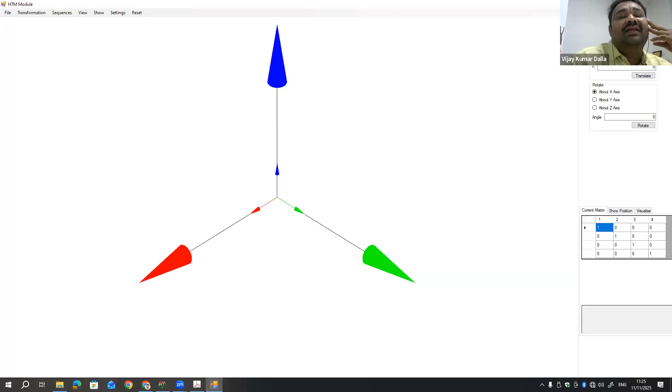So through this software, we are going to visualize. Now please look into the window on the right side and see here local and global transformation. Local transformation is by default clicked, and one can see translate and rotate options, and in translate there are three axes: x, y, z. Initially the values are 0.

After putting some values, we need to translate, and then we can visualize. Also if we click rotate about any axis like x, y, z, then we can see the rotation of the frame. Here one can see there are two frames, a bigger one and a smaller one, both coinciding with each other at the origin.

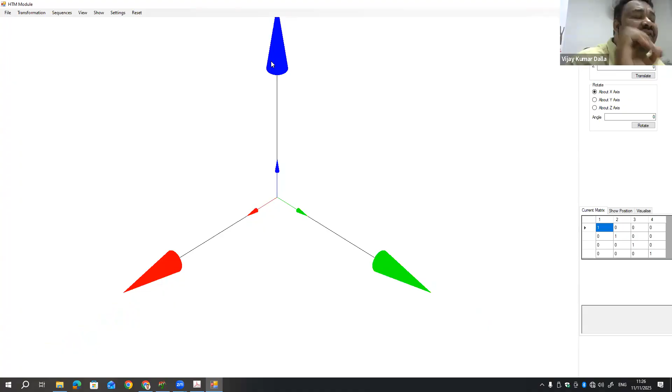So the bigger one is the fixed reference axis, you can say, or absolute frame, and the smaller one is the moving frame.

So what is the learning here? What is transformation? I have told the definition. And what are the various types of transformations? Pure translation, pure rotation, and the third one is rotation plus translation.

Am I audible? Please let me know if it is useful, if you feel that yes, we are gaining something from this.

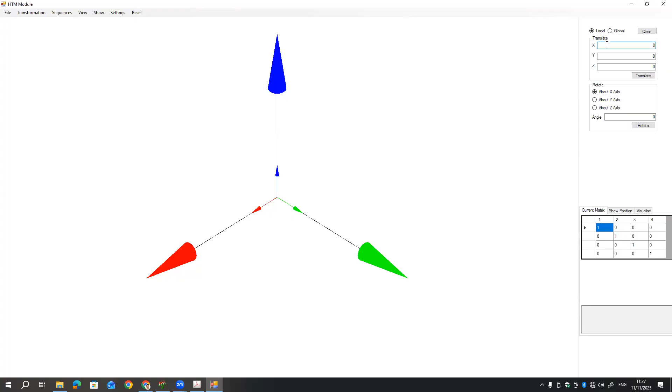So now we have to visualize the translation. You may have already studied or taught translations before. Let me know if there are some queries. No queries, I think. Okay, so now for translation, suppose we want translation in the x direction.

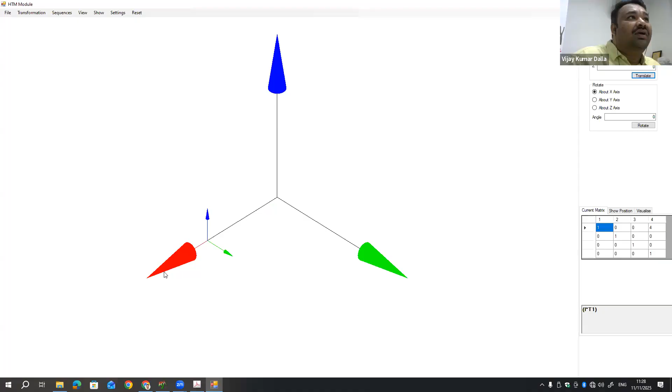And I am putting some random value, like 4 units, along x. Now you can see it is along the x axis, and then we can reset. On resetting, it will come back to its original position.

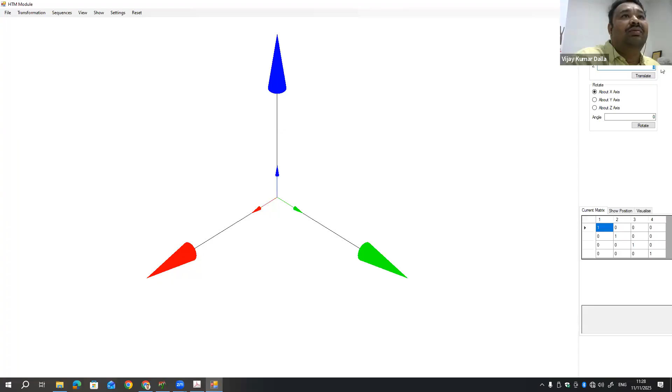Okay, and x is equal to 0 again, and we want to visualize only z-axis translation, and we put some value like 6 units. Now see the translation is along the z direction.

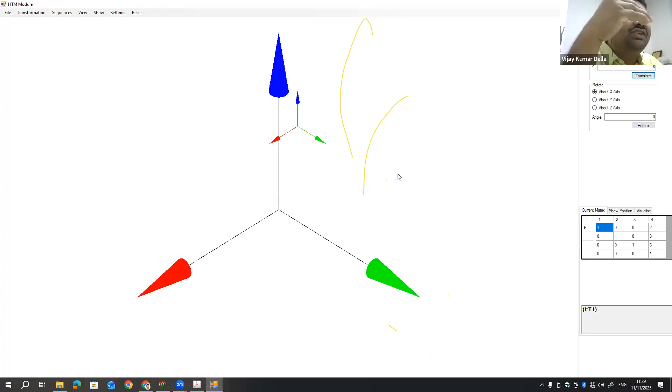If we put values on all the axes, then what will happen? You can see. Yeah, and again after resetting, now we can see this. So there is a pure translation along X, Y, and Z.

So what is the meaning of this? What is the significance of this? Suppose this frame is attached to the hand, the end effector of the robot. This end effector was initially here at the origin. Now it got translated from here to here, the moving frame, you can say.

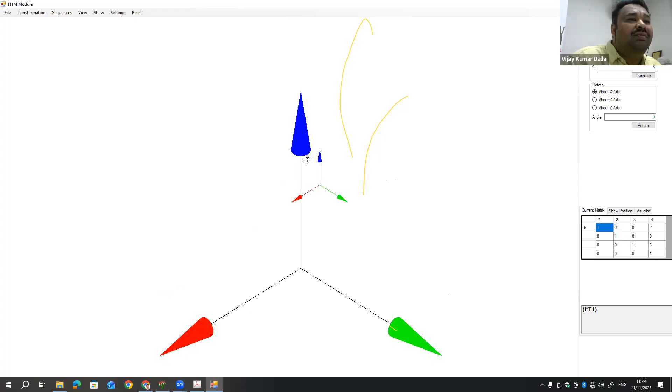Okay, similarly, suppose we want to visualize the rotation. So rotation, suppose we want z-axis rotation, and give some random value, suppose 60 degrees.

You can see here the rotation is along 60 degrees. Let's see how many transformations there are now. One transformation and rotation, second transformation, rotation, third, fourth, fifth, sixth rotation - after 6 rotations it comes back to its original position.

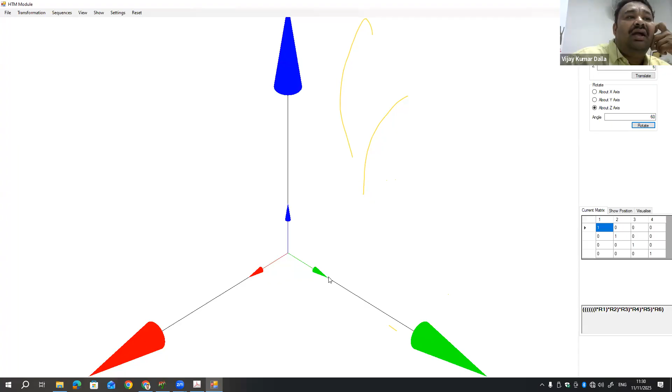What is the learning here? The rotation is about the z-axis. Which one is the z-axis? This one, the blue one, marked by blue color, is known as the z-axis. And you can see here, this is the moving frame and this is the fixed frame.

Both are coinciding. So suppose there is a rotation about the z-axis, so rotation will be there about y and x, not about the z-axis. It is very clear - it is rotating about its own axis. That's why.

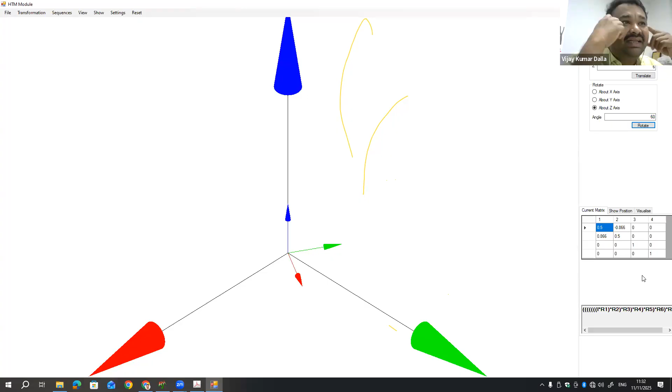One very important thing - if you see this matrix, it is known as the homogeneous transformation matrix. What is the significance of this matrix? It's a 4 by 4 matrix. First, what is its character? Transformation, homogeneous transformation matrix means a square matrix of size 4 by 4. And from this, what information do we get? We get information about the orientation of the end effector.

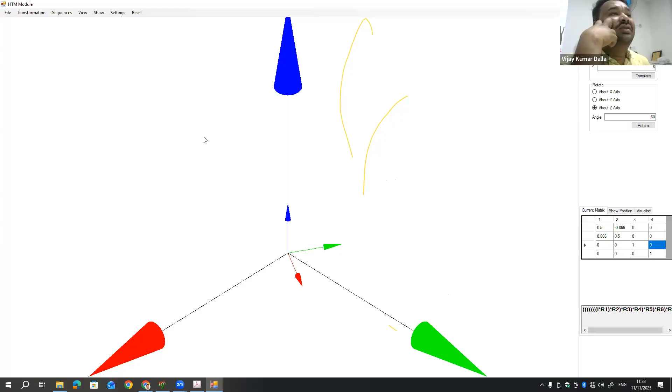If you want to ask any question regarding this, you're welcome - what is this transformation, what is local versus global, why we are doing XYZ translation, why we are doing rotation about various axes, what is the nature of this homogeneous transformation matrix, and what about the sequence of these transformations? You're welcome, you can ask questions.

Yes sir, I think there is no question. Please proceed sir. Am I properly audible now? Yes sir, properly audible. No problem, am I able to make you understand? Yes sir, yes sir, I understand sir.

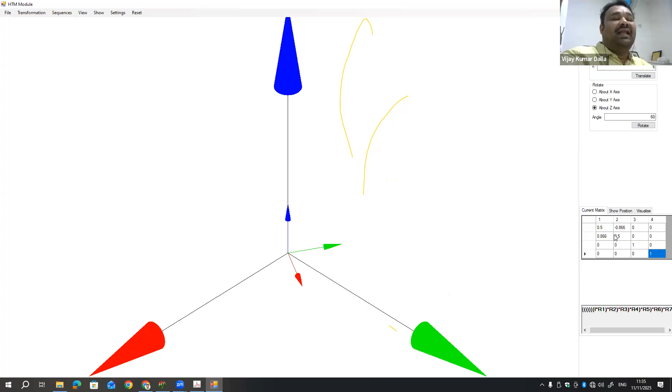Yes sir, and this one is a zero matrix and it is a perspective matrix. Intentionally we make it a 4 into 4 square matrix so that we can multiply all the matrices and at the last we can get the position and the orientation of the robot. That is the main motto behind using this homogeneous transformation matrix. That's why it is written as the HTM module, homogeneous transformation matrix module.

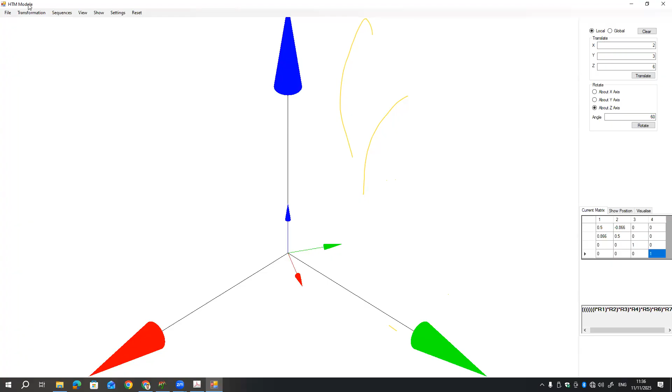Okay, yes sir. After this, the second part coming to the software, the main part. Here we will visualize... uh, why is this coming? I don't know. Okay, let me try again.

Hello. Sir, you're audible sir, go ahead. Audible, no problem, audible na? Okay, yes, okay.

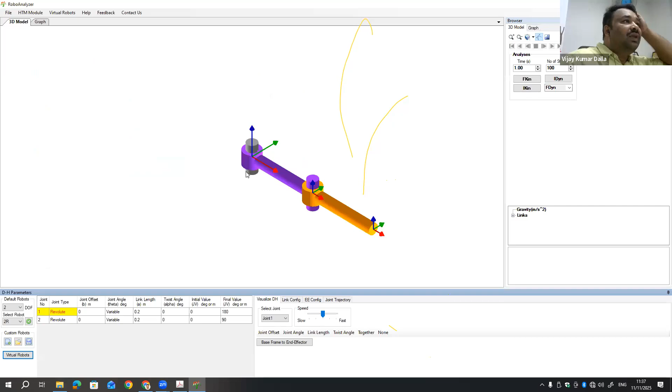Now, next is to visualize the kinematics and dynamics of a robot. So let's understand this in parts. First, if you see the DH parameters below, if you see the cursor, there are the DH parameters - meaning the 4 parameters: joint offset, joint angle, link length, and twist angle.

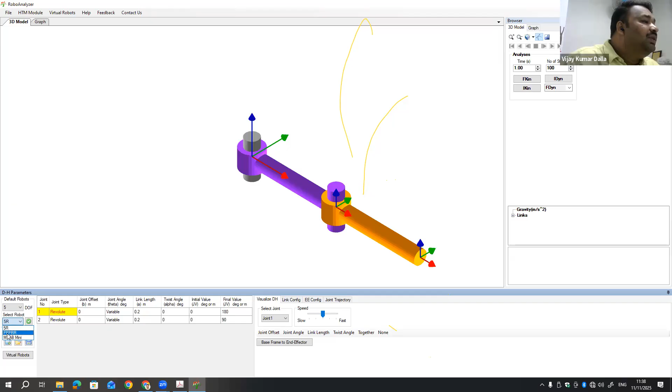Default robots are there with various degrees of freedom. Suppose we select 5 degrees of freedom, like 5 revolute, prismatic and revolute joints - these are based on the joint types. So it looks like a robot.

What is the use of this RoboAnalyzer software? Suppose we don't have any robot because it is very expensive, and even if you have a robot, firstly we should know how to handle it - what are the basic things. That's why knowing about this software means having exposure about this. I am not talking about the software itself, but the exposure - the motion visualization is very important for the learning point of view, basic learning point of view.

So the robot, you can see here, what is this? This is the base of the robot. And this is the frame that is attached to the base.

Okay, and what about the arm? You can see this is the arm where the motors are, the purple color you can see here, this part is the motor, and this is the part of the link.

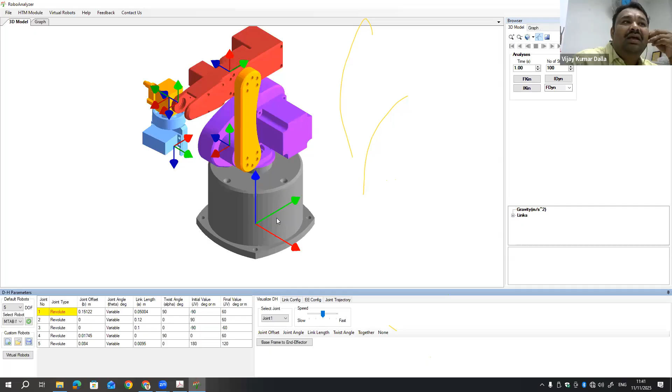Okay, so please have a look, base frame to the end effector. And what is happening, this frame will be moving or translating or rotating, means moving.

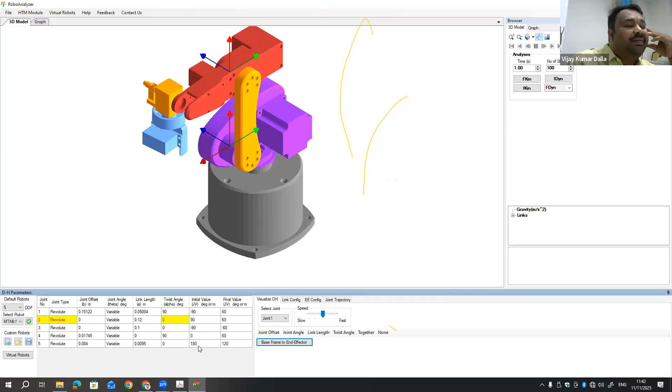Simultaneously just see the below table, that is the homogeneous transformation matrix. No sorry, DH parameters. That is the DH parameters.

Aap dekh sakte hain what is happening, link length. Ab yahan pe dekh sakte hain twist angle, and now joint number 2 revolute, and a joint offset is this much, joint angle it is variable, then it is taking link length. There is, and in this way.

Difficult to follow this, but the good thing is how the frame got moved from the base to the end effector. Uske liye kya kya karna pada, toh aap dekh sakte hain kya kya karna pada.

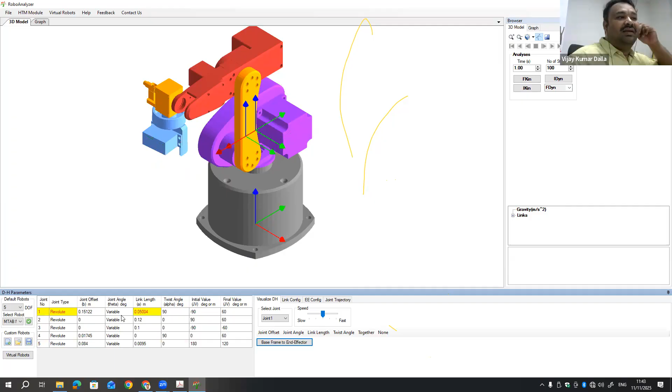So if you see joint number 1, then which kind of joint is there, revolute, and a joint offset is what, if there is suppose, let me better, aap dekh sakte hain here the joint offset, this length, and link length, and the twist angle.

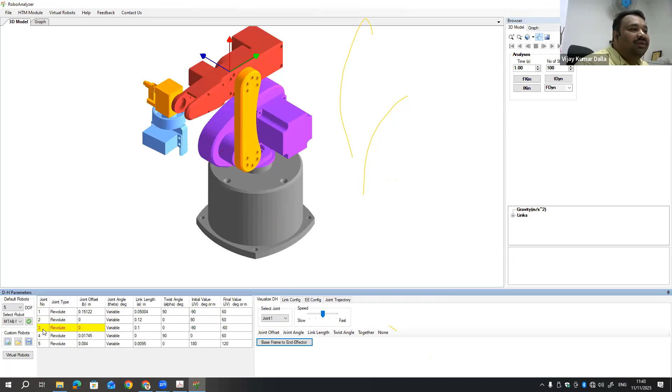Aap dekh sakte hain joint the data corresponding to joint number 2 it is taking, and joint number 3 it is taking, and the movement we can see in the robot. What is happening?

So it is good for the BTech students.

Okay, now it is the 3D model.

And the visualization, we can see the motion visualization, we can see through the forward kinematics. The difference between kinematics and dynamics is what?

Kinematics, where we study about the motions. Hum usme motions dekhte hain, not the cause of the motion. But in the case of dynamics, we consider both the motion and the cause.

Aap isko aise samajh sakte hain in the case of kinematics. In the case of kinematics, we study about output, not the input, the force or torque.

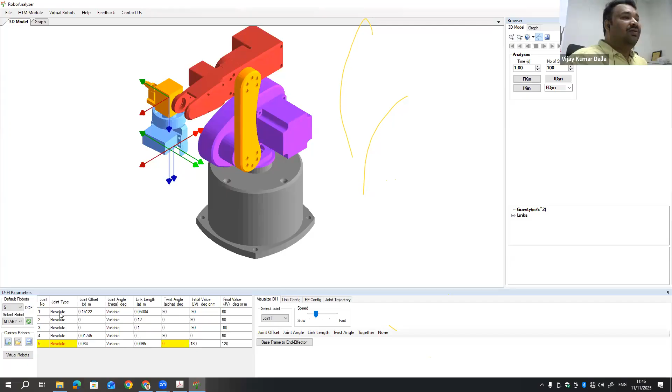How many transformations are there? 5 joints are there, so 5 degrees of freedom are there. And whatever the number of transformations will be there, the matrices we need to multiply, then we will get the forward kinematics.

If we will analyze, okay, so after clicking this forward kinematics, aap dekh sakte hain yahan pe analysis is done. Agar isko hum manually karein, so it takes time.

And for the complex robot, it is very difficult, not easy. Manually we can do, obviously we can do, but it takes too much time.

Okay, so now our objective is to visualize the motion. So again, once again, this forward kinematics, I have clicked it, and we want to visualize the motion. Aap dekh sakte hain.

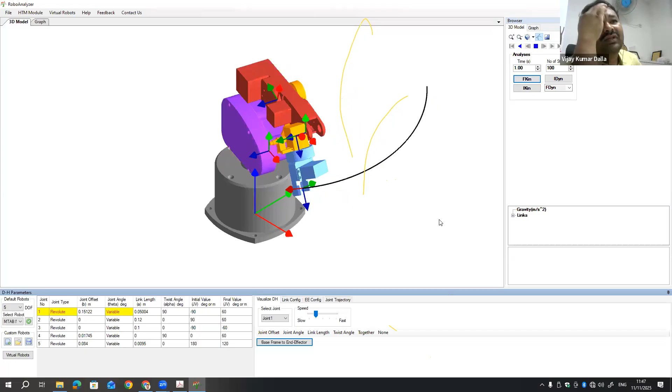Once again, this visualization is through the 3D model. This we can see through the graph as well. The visualization either can be seen through the 3D model or through the graph.

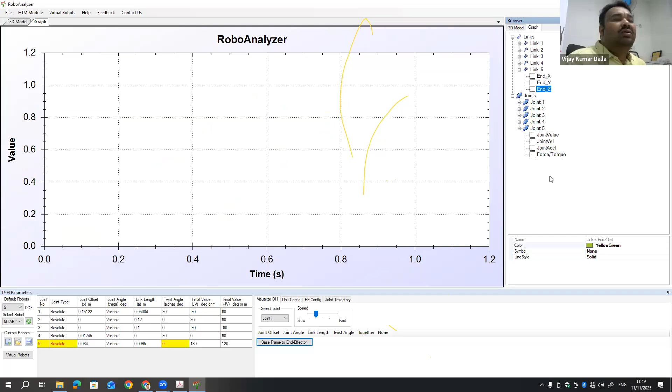Similarly, if we want to know about the angular position of the robot's joint 5, this is the angular position, and we want to know the joint velocity, this is the velocity, and joint acceleration. Individually, we can visualize it of any links, or any joints, we can visualize.

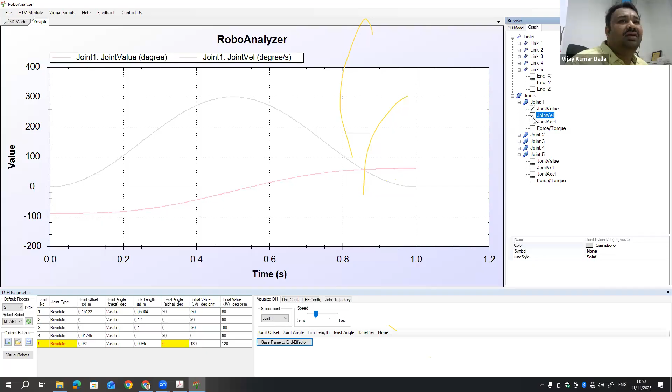Like suppose we want to visualize joint 1, so this one, this one, this one, and this one.

So here, the difference between the kinematics and the dynamics can be seen. After clicking this force and torque, suppose we want to know about what are the forces or the torques involved, what are the causes, what are the values of forces and torques, so we are unable to get this information. Why? Anyone, if you can answer?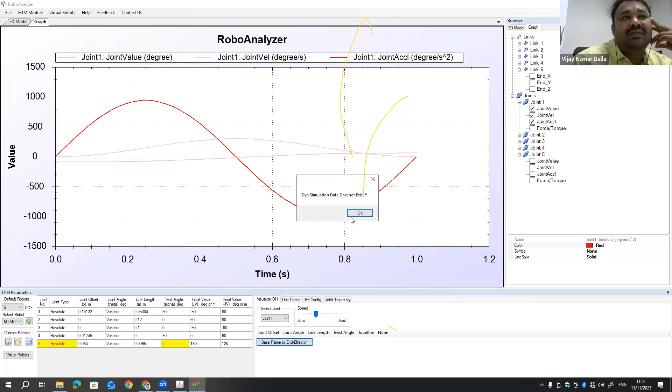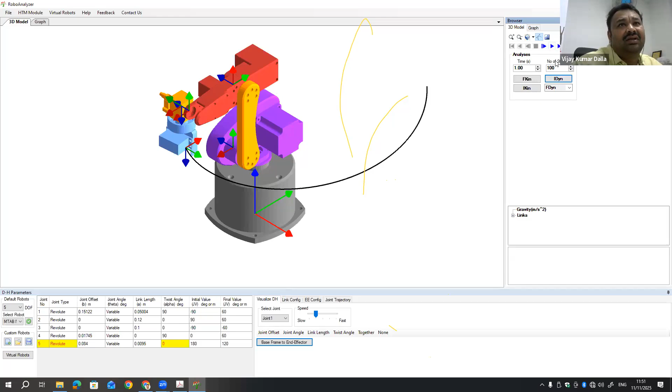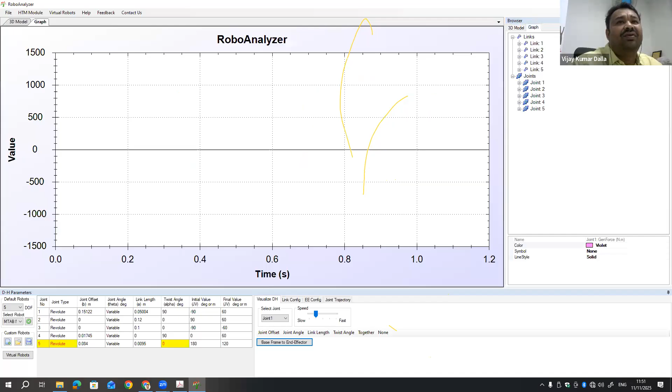Once again, after clicking this force or torque information, it is saying the inverse dynamic simulation data doesn't exist. So here there is a difference between kinematics and dynamics. Similarly, suppose we do forward kinematics and then inverse dynamics, means the dynamics, then we won't be able to differentiate between the trajectory motion. The trajectory motion will be same, but through the graph we can know about the forces or torques involved.

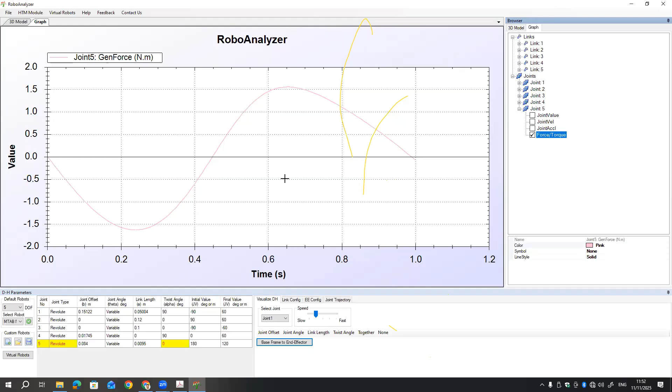Sir, in definition, how can we differentiate the forward kinematics and inverse kinematics? Reverse kinematics, I think. Okay, yes.

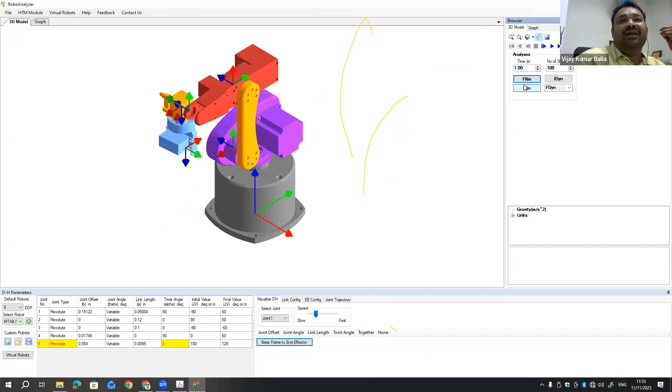So this we have done forward kinematics. Now, inverse kinematics, suppose if I click, this is the inverse kinematics. And we can see here, we can select any robot.

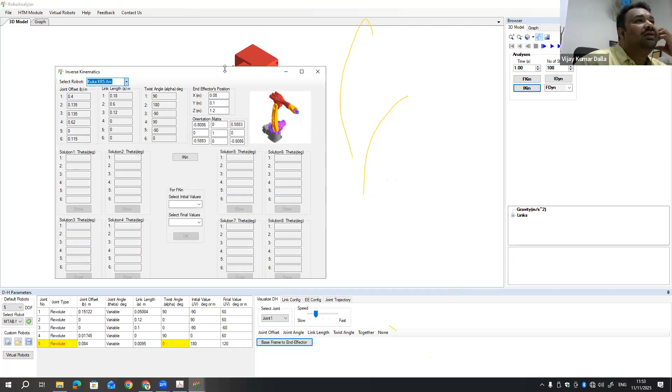Like a KUKA robot, if I select, if it is visible properly, this window, new window, I'm moving it. Is it visible? Yes, sir, visible. So the difference between the forward kinematics and the inverse kinematics.

So in the forward kinematics, what are the things given? Means input and the output. In terms of input and the output, we can know. I'm talking about forward kinematics.

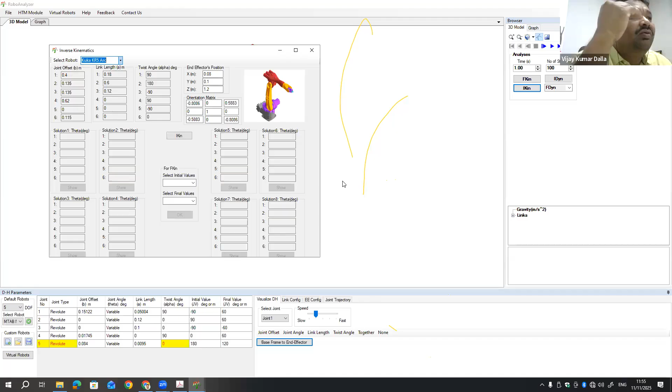Because in the case of robotics, along with the revolute, the joint may be prismatic, that's why joint variable. So for the given joint variables, what are the values of x, y, z? Or you can say for the given joint angles, where is our robot? So that is forward kinematics.

Now inverse kinematics, what happens in inverse? The output becomes the input. In the case of forward kinematics, the output was x, y, z. But in the case of inverse kinematics, it becomes the input. Input x is equal to 0.08 meter, y is equal to 0.1, z is equal to 1.2.

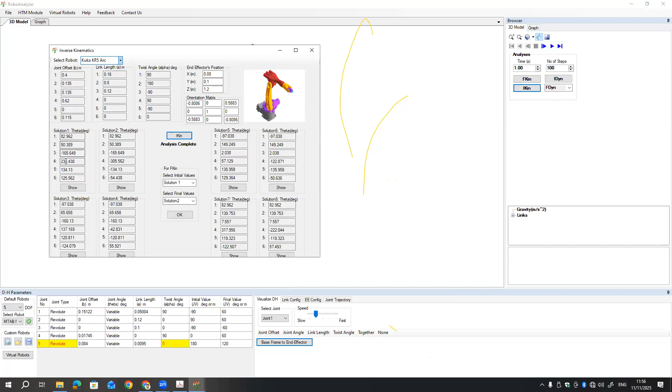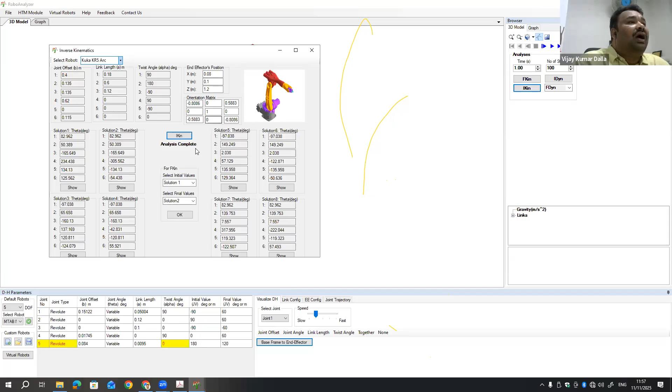See here, this is one set of one kind of solution. This is another solution. This is another third one, fourth one, likewise fifth one, sixth one, 7, 8. Up to 8 solutions we can see by default in this software. Now, let me ask to show solution 1.

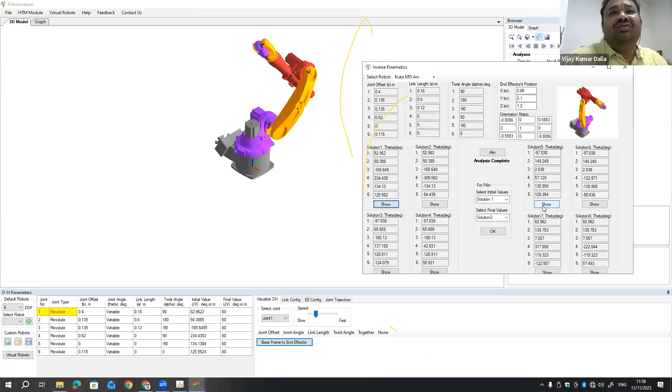In inverse kinematics, the x, y, z means end effector position will be fixed, but the arm configuration will be different. Now suppose more changes will be there, like in solution 5, you can see the end effector at the same place, and solution 8, solution 2, solution 4. So this is the difference between forward kinematics and inverse kinematics. We could visualize this through this software, which is really very helpful for the learners.

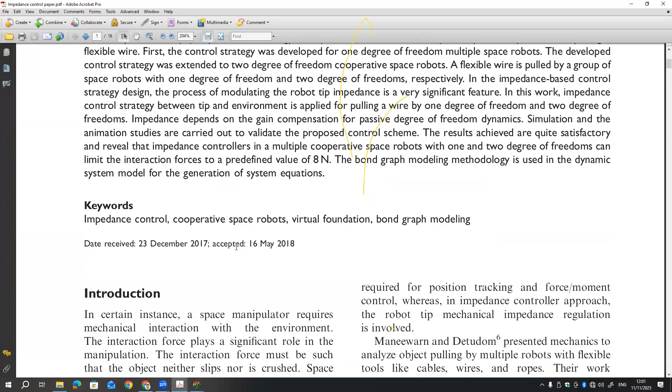I have used the bond graph model, in which I have exposure. MATLAB I have used very little, for a portion for the optimization. So exactly how to use MATLAB for this, I cannot say correctly, but definitely you can have my number, I will share you the information. I can guide you. But right now, because I have exposure of bond graph software, like in my paper, if you see, through this, the graphical way of representation that is known as the bond graph. Through this I have done, but definitely I will share you. You can have my number, I will share you.

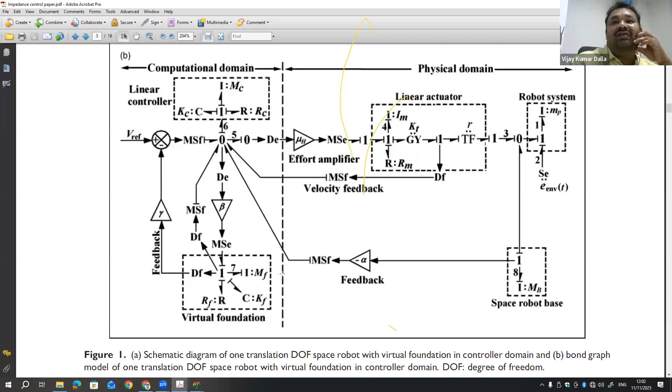Sir, there is one more question. Hello, from Dr. Himanshu Patel. How will AI-driven robotics shape manufacturing and autonomous systems in the next decade?

It is like a question, how AI will help in manufacturing. Is it? Yes, sir. So this I can share.

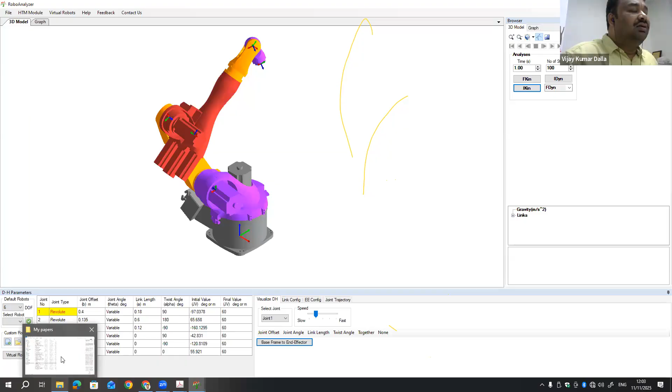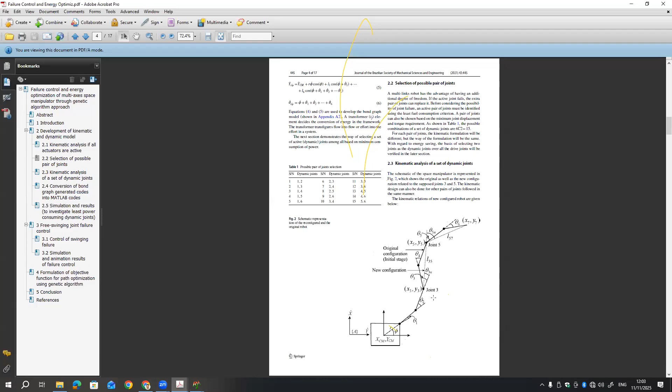This is the robot. It has 6 degrees of freedom, and it is redundant, meaning it has extra degrees of freedom. But suppose it is a planar robot, meaning the manipulation will be done in the x and y, or any two axes. But the number of joints are more, meaning 6, so we have extra degrees of freedom.

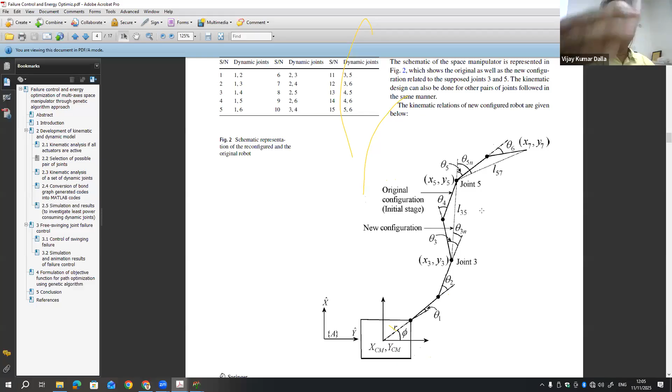So AI can be used here, like in this case, to determine which joints the AI can help use properly for whatever task we require. So which are the joints that can be helpful to minimize the energy consumption. Ultimately, suppose this is for a space robot, sent to space where there is a limitation of fuel, so our primary duty is to save the fuel. So from the design point of view, from the fabrication point of view, which joint should have more flexibility, meaning all joints will not participate in the same manner, cannot contribute the same.

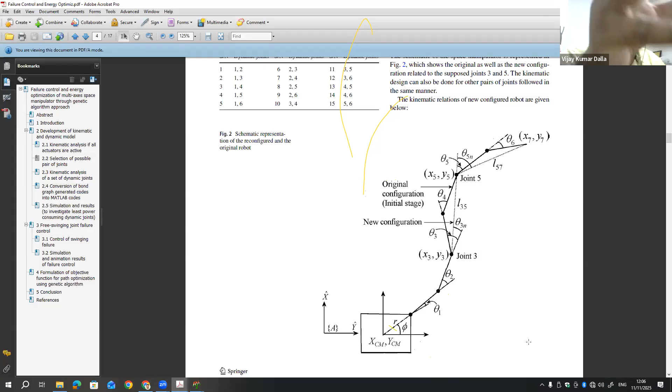So that's why, suppose joint 1 can be utilized more, joint 5 can be utilized less. Suppose a robot is employed for drilling purpose, for machining purpose, and needs to be more flexible. For that, what should the design and fabrication be? The robot should be redundant. Why redundant? Suppose there are obstacles in the workspace, so those obstacles can be avoided. So here we can use AI for proper exploitation of the joints so that obstacles can be avoided, the design can be done accordingly, and various purposes can be solved simultaneously.

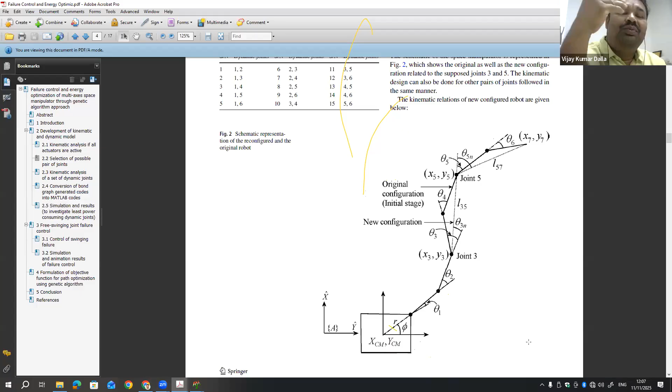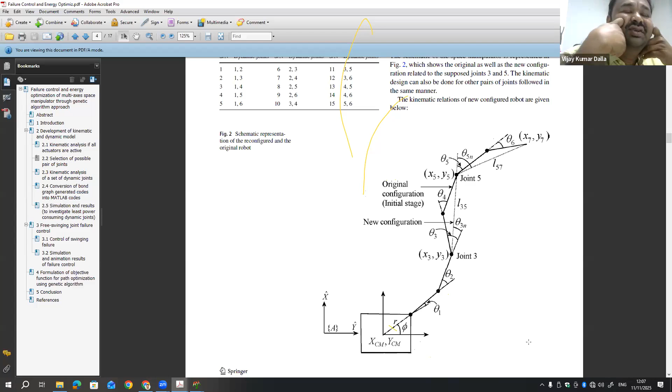Suppose we have 6 joints, and at a time we want to use only 2 joints, and the other 4 joints will remain inactive, 2 joints will remain active. So which joints can be those? How to know that? That can be known by using AI. So I have used the genetic algorithm in my research, and from that I was able to save the onboard fuel, for the optimization purpose. So here, for designing and for fabrication, obviously we can use AI in manufacturing.

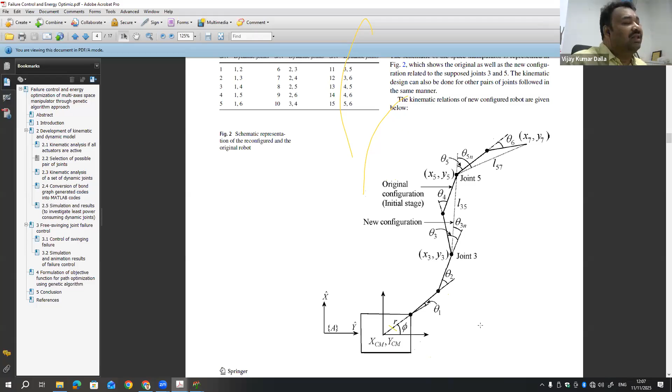Is it okay, sir? Sir, yes, sir. Proceed, sir. Please. Okay. Yes.

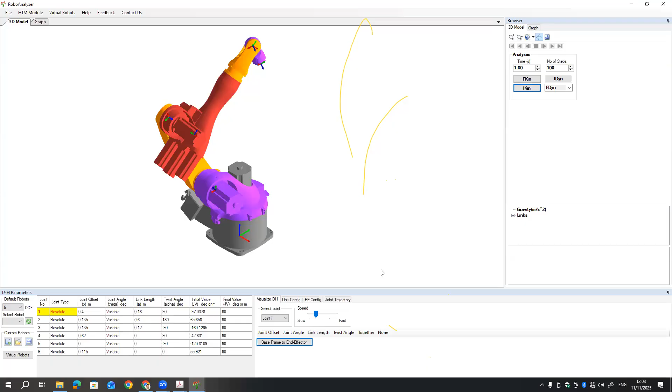And the virtual robot, next stage, the virtual robot. Through this, the learners can have exposure. Suppose you have a robot, and as per your choice, here you can select your robot. Here, selecting and loading, clicking this arrow.

Now, suppose you have to identify the joints, which is joint 1, 2, 3, 4. So, and how to control the joints. So, we can control through the joint or you can control through the Cartesian.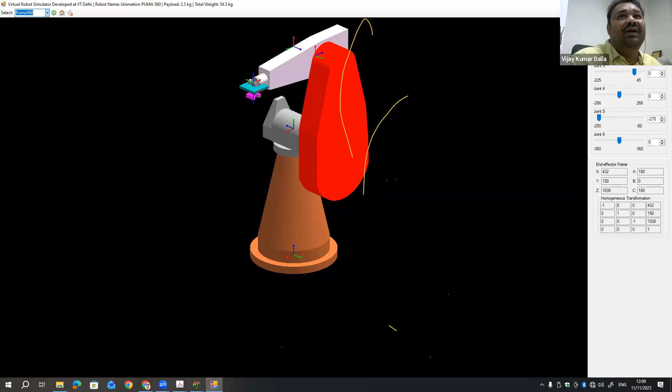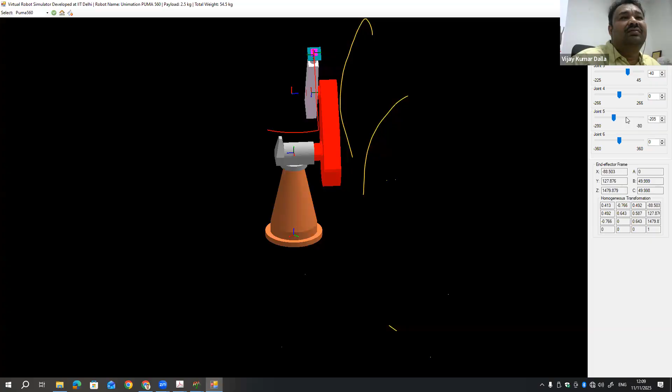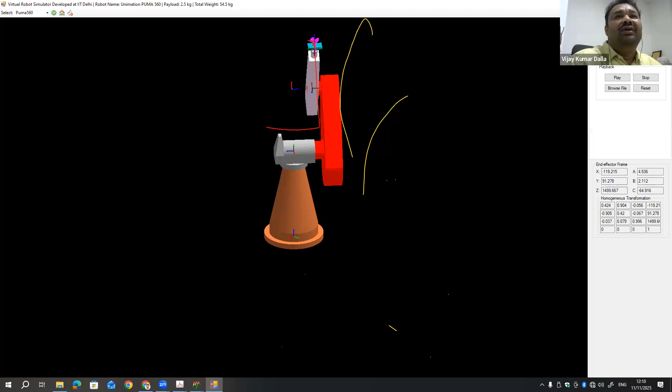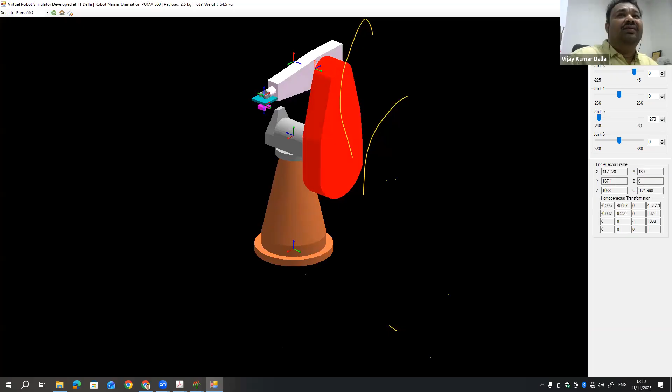Like a joint fifth, joint 6. Okay, this is through the joint, now this can be controlled. Let me record this once again. I'm doing it, I'm clearing the traces and making it home position. And now, record start and controlling the joints - it is known as jogging.

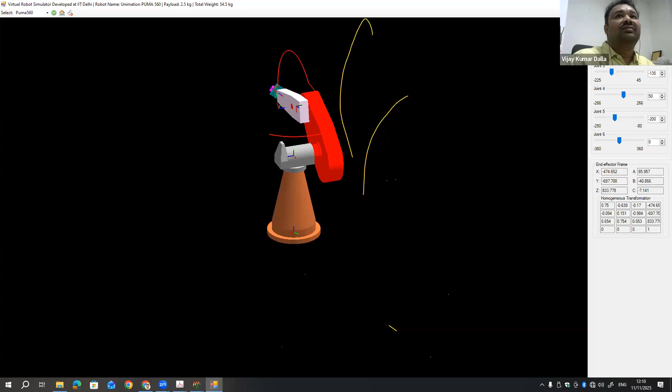And then we can stop it and we can play. In this way, we can control the joints.

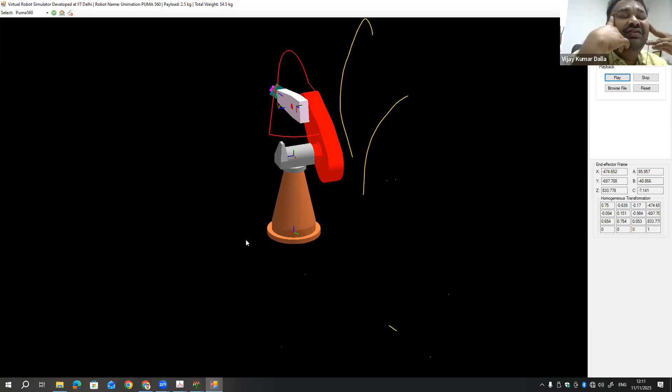However, the robots were initially made for the industrial purpose. Industrial robots were made initially - the robot's name is Unimate. Through this, however, it is not directly related to manufacturing, but manufacturing is done through the robots, and we should know the basics of robots - how to control the robots, what are the motions, what about the kinematics, what about the dynamics, what about the forward kinematics, what about the inverse kinematics, what about the matrices involved.

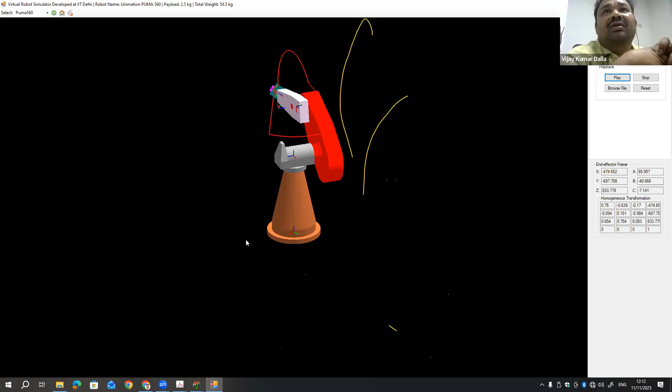What about the transformation matrices, like pure rotation and pure translation. So in this way, we can have exposure, and that can be - the robot can be used for manufacturing, and that's why we should know the basics about this. And now...

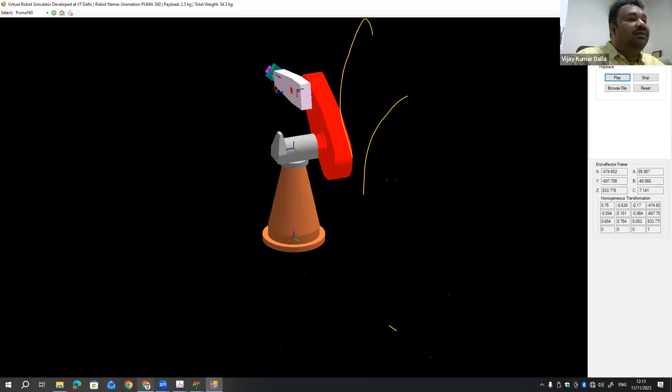My PhD students are here to share some electronics parts required for robot making. Are you ready for the robot making? How to make a robot? Ready? Yeah. And before that, yeah, so please come.

And how to ensure whether it is visible or not.

One of the audience is asking, sir, is this software open source or a paid version? Initially it was open. Now it is commercial, for one license, 7 lakh something.

Yes, thank you sir. My PhD student is here, and he is going to tell about the various parts of the robots.

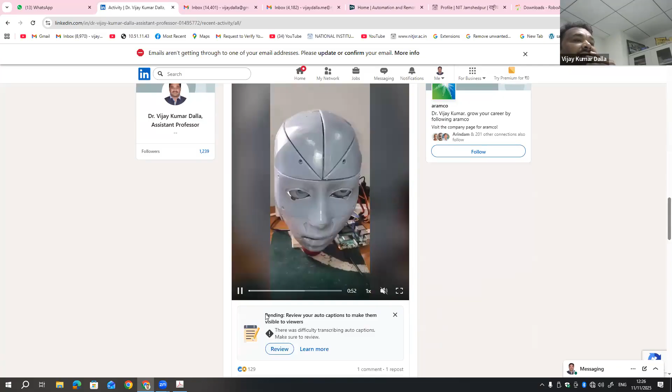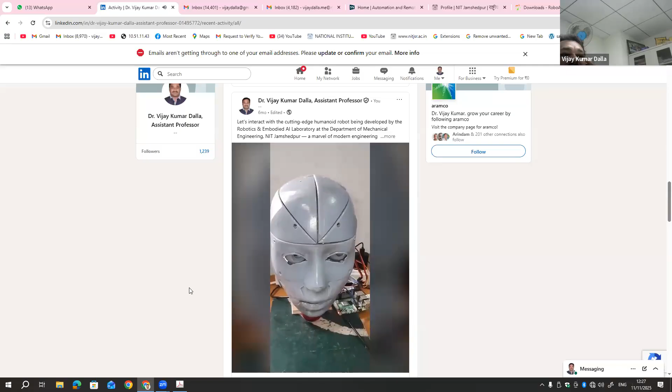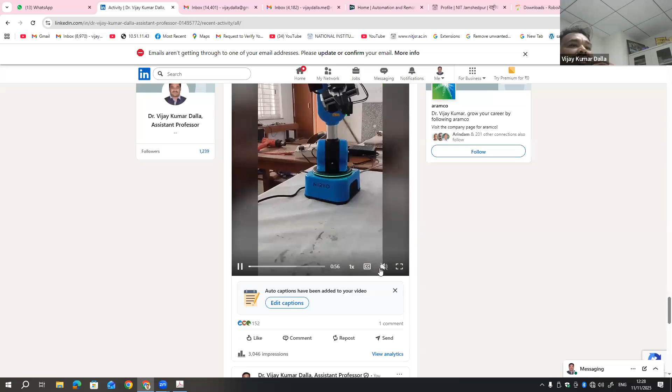This one can see, this is the robot head. It can interact with the audience, developed by the BTech students. Like if it is audible, and the lab developed this is the robot.

6 degree of freedom robot.

Two projects, underwater projects are running, and other than that, some BTech students' projects.

In this way, from our side, we tried to give exposure to the basics of robotics and the basic components required for robotics. Robots are being used in industries very much now, nowadays for the automation purpose. So I think this exposure may be a little bit helpful for the participants.